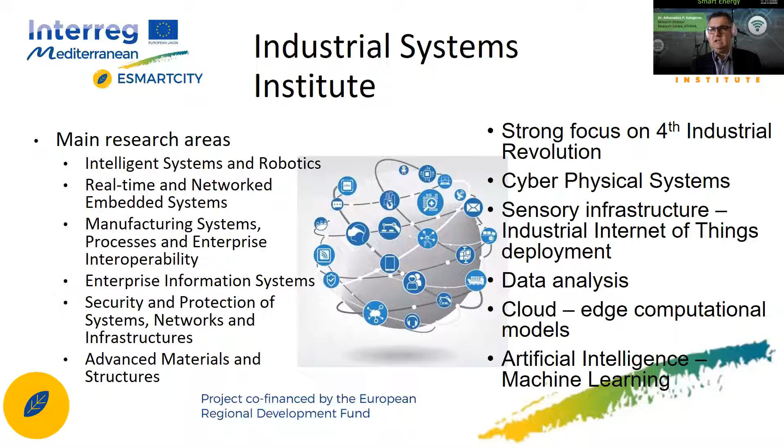It is an institute that focuses mainly on industrial systems, so the main research areas are intelligent systems and robotics, real-time and networked embedded systems, manufacturing systems, processes and enterprise interoperability, enterprise information systems, security and protection of systems, networks and infrastructures, and advanced materials and structures. We have a strong focus on the fourth industrial revolution from the point of view of cyber physical systems, systems that combine the cyber dimension and the physical world. This means deploying sensor infrastructure, the industrial Internet of Things, getting data out of it, exploiting cloud and edge computing models, and on top of it applying machine learning and artificial intelligence to have advanced services.

So the motivation behind our problem is that urbanization is a trend in our world. 60% of world population will be living in cities by 2030, and the urban population is increasing by 1.5 million per week. Cities account for 60 to 80% of global energy needs, so actions taken in cities can have a significant impact on energy saving and energy efficiency. When it comes to buildings, buildings use about 40% of total energy and 70% of electrical energy, and account for 1/3 of greenhouse gas emissions.

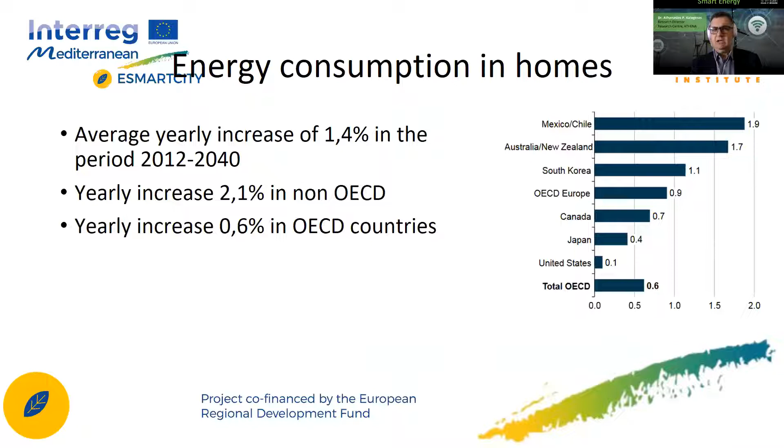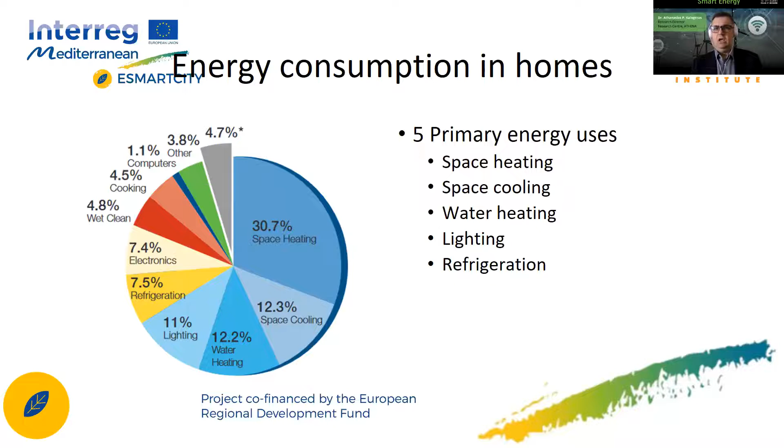With reference to energy consumption in domestic buildings, in homes, there is an average yearly increase of 1.4% in the period 2012 to 2040, with the increase in non-OECD countries being 2.1% and 0.6% in OECD countries. The 5 primary energy uses in domestic buildings are space heating, space cooling, water heating, lighting, and refrigeration. When it comes to the commercial sector, the average increase is 2.1% in the same period, 3% annually in non-OECD countries, and 1.6% in OECD countries, with 5 primary energy uses being lighting, space heating, space cooling, ventilation, and water heating.

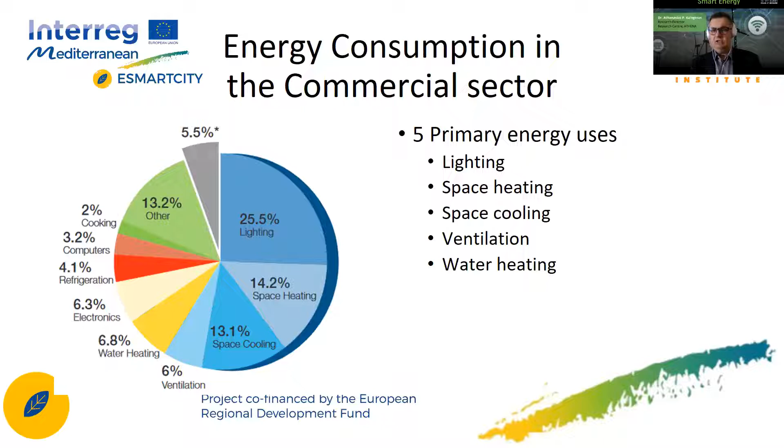So the project stood up to this challenge and performed pilot testing in 6 different countries related to 2 cases: energy efficient buildings and public street lighting. To this end, we had 4 public lighting networks in Sarajevo, Bosnia-Herzegovina; Lyon, France; Pescara, Italy; and 2 municipalities near Granada, Huetor Tajar and Agron in Spain.

Then we had a second case involving public buildings from the point of view of energy efficiency, so we had a total of 53 public buildings in Greece, Italy, and Portugal. The project produced a strategy document, a green paper on innovation policy change to drive towards smarter cities, which is available and can be downloaded from the project website with some policy recommendations to this end.

The pilot case, one of the pilot cases associated with energy efficient buildings, was employed at our building at the Patras Science Park, which had as a goal to experiment with energy efficiency and living lab scenarios, deploying the necessary infrastructure for monitoring, controlling, optimizing, and testing energy efficiency.

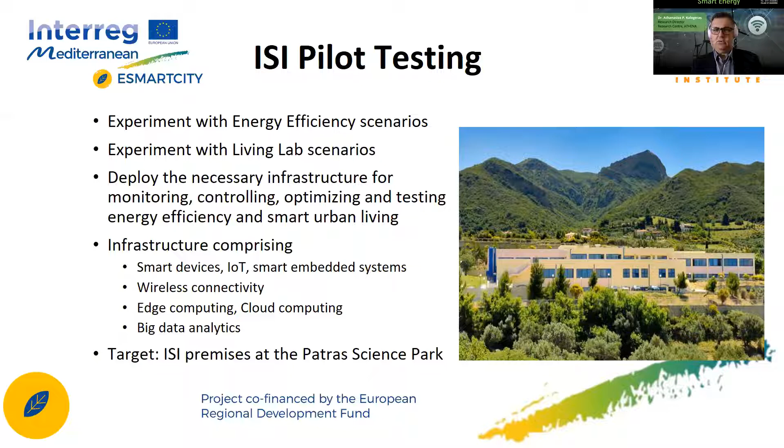The specific goals were to take advantage of high performance IoT technology, to integrate diverse devices with a lot of heterogeneity, to prove interoperability between solutions, to exploit open source solutions wherever possible and be based on standardized protocols, to adopt a suitable distributed embedded infrastructure, to utilize edge computing and cloud computing so as to exploit the intelligence at the edge of the network, to utilize industrial Internet of Things data acquisition platforms, and to finalize and deliver smart monitoring and control solutions integrating big data analytics for energy consumption and providing optimization of user comfort.

And the solution provided is scalable and replicable and can be transferred to other sites.

The proposed system comprised different types of parameters. There was power consumption, light, humidity, temperature, and human presence that were measured in the building.

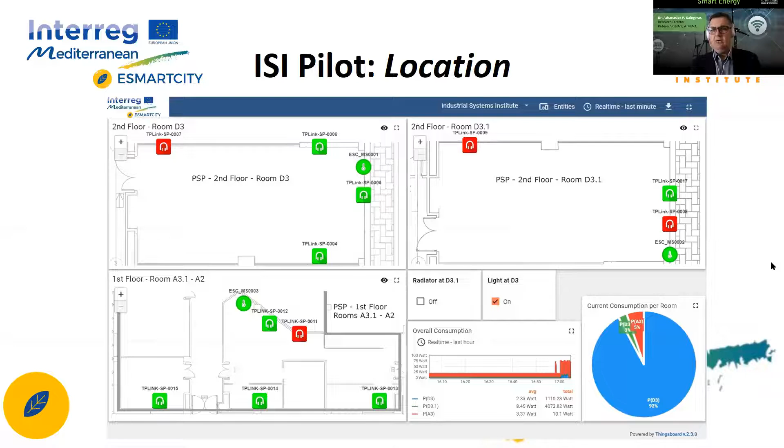Here is an image from the final system with the location of the different devices installed, and here is a panorama of the different technologies. You can see from the hardware point of view that different solutions were integrated, both proprietary and open source. Also different communication technologies were utilized, and finally different software platforms were integrated to provide the overall solution.

The architecture that we used involved the measuring equipment and the IoT equipment at the edge tier with different communication technologies, Zigbee, Wi-Fi, interfacing to the platform tier via the MQTT protocol. A NoSQL database, Cassandra, was used, and the information finally passed from a commercial platform, Thingsboard, to the enterprise layer where the intelligence of the system resides.

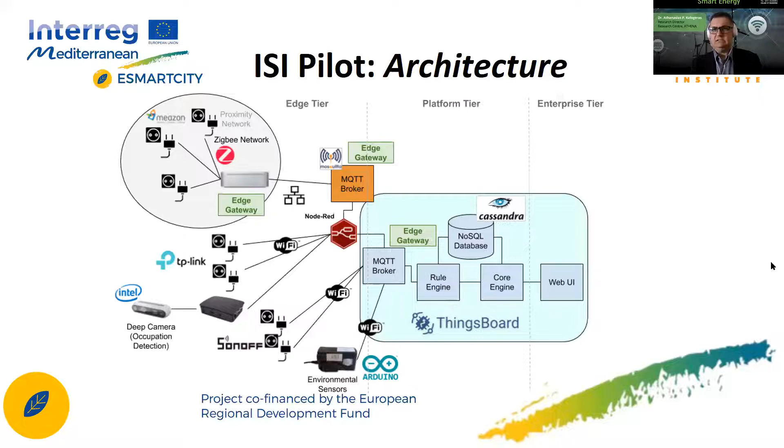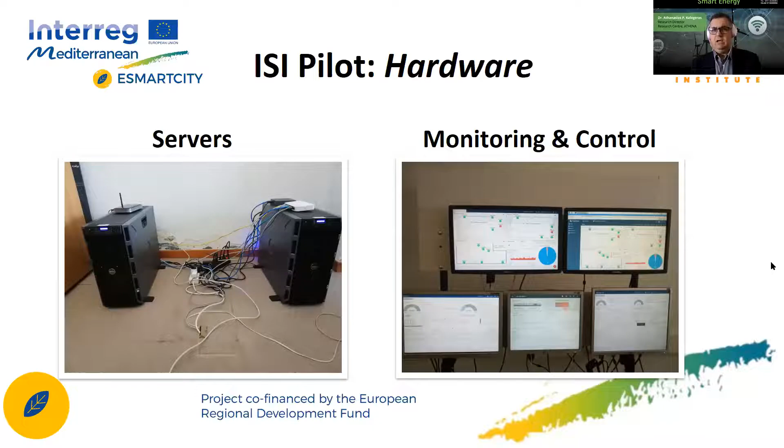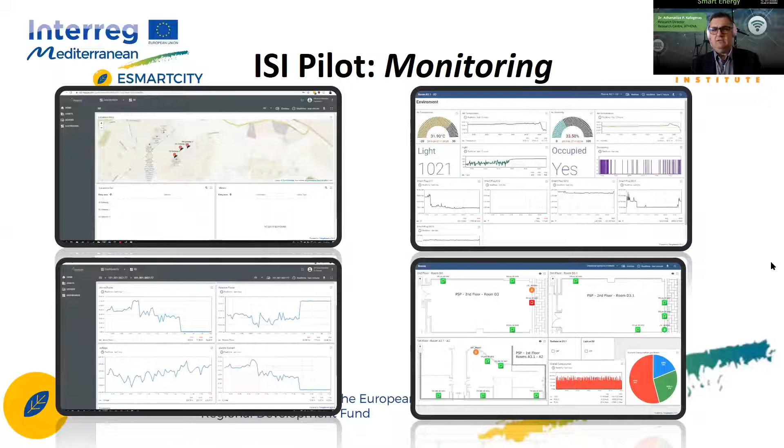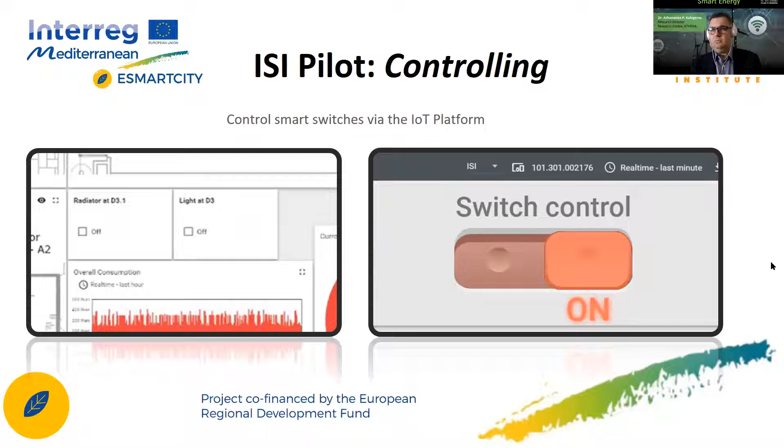And the HMI with the monitoring, providing different types of views so as to be possible to see the energy consumption and the different other measurements at the building level and on the different offices and laboratories. And finally, some control is also possible via the system, with optimization using a rule-based mechanism for scheduling and optimizing the power consumption.

The overall idea is that there is a data set that comprises the different measurements from the building. Then the question is what you do with this data, how you analyze it, and how you exploit the data towards achieving more advanced features.

So here we tried to see how we can deal with imbalances in energy demand and steep demand surges, disassociating the demand time span with renewable energy production, with a goal to detect load profiles whose peak demand could be not according to the power grid. As Moshe said, this might be a very important factor because otherwise you should build more power plants, etc.

So some ideas about energy profiling. This is a powerful tool for estimating the overall energy consumption. You can use static factors like the building orientation, the occupancy of the building, the environmental conditions, etc., that can contribute to estimating the energy consumption of a building.

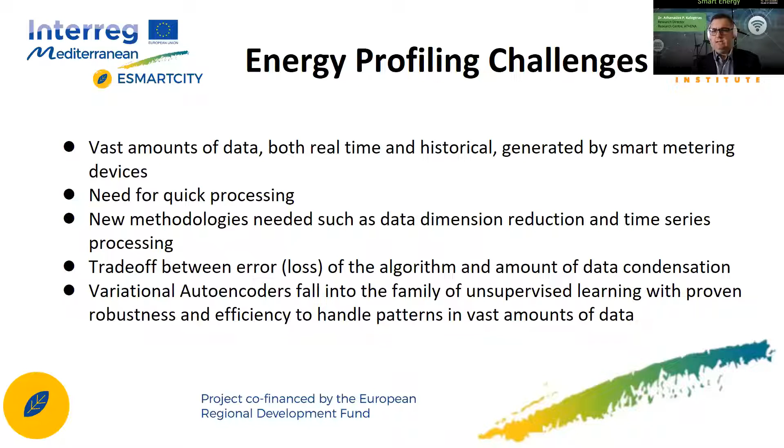Our proposal was to employ such a mechanism and enhance the variational autoencoder, applying recurrent neural networks in the encoding and decoding modules at the start and the end. You can see there are two units called LSTM encoder and decoder, which stands for long short-term memory neural networks, used to encode and decode data.

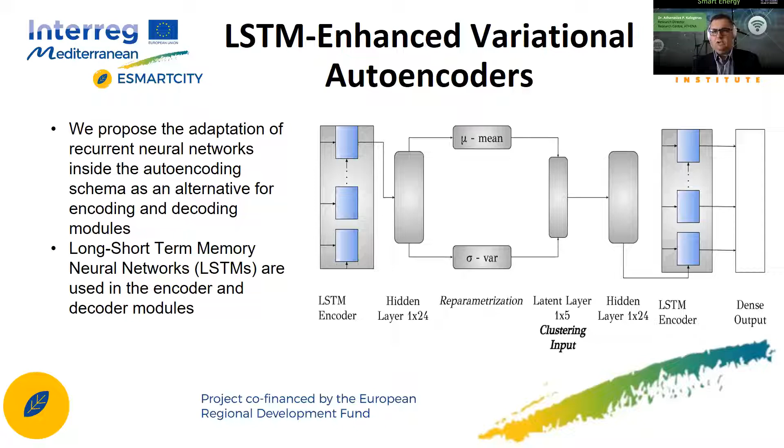This autoencoder is trained to output the given input data series, with the beginning and end modules, the encoding and decoding modules, replaced by recurrent neural networks so as to captivate time dependencies.

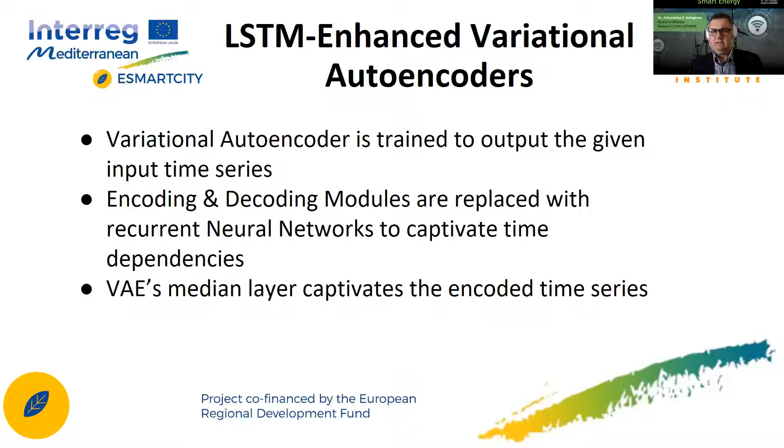In order to evaluate this approach experimentally, and due to the fact that the data set from our building was too short, only one year, we needed larger data sets to proceed. We took into account a residential sector data set from London, an open data set derived from the address depicted on the slide, which contains identifiers for the different residencies, the specific date and time of measurements, and the power consumption of the residential building.

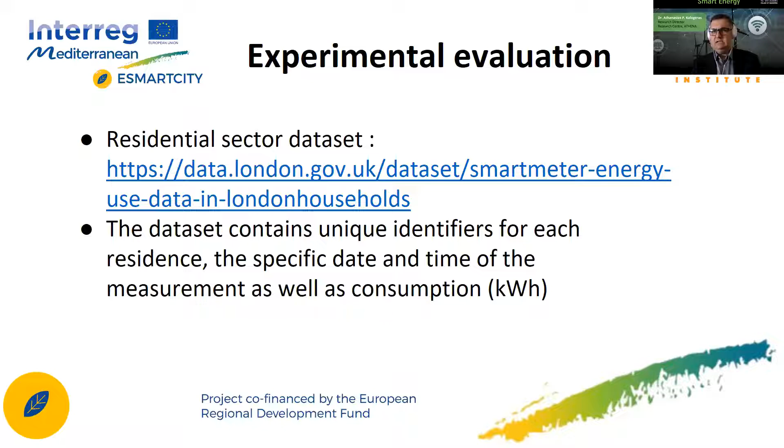Based on this, we split the residential buildings into two clusters. One cluster is compliant with green energy and modeled according to the green energy supply - imagine you have photovoltaics on the building producing electricity. So we clustered the buildings into two categories: one where power consumption is according to the generation of energy, and one that is complementary.

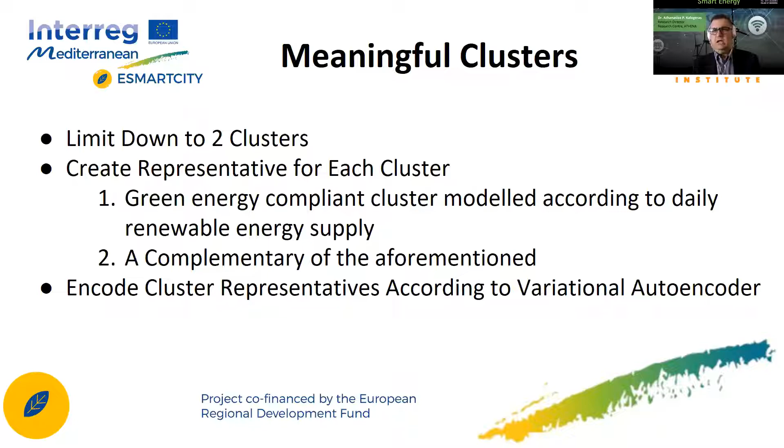We encoded the cluster representatives according to the variational autoencoder, and here you can see the two cluster characteristics. The second cluster is somehow compliant with the energy consumption of the power generation by renewable energy, and the first is the complementary of this.

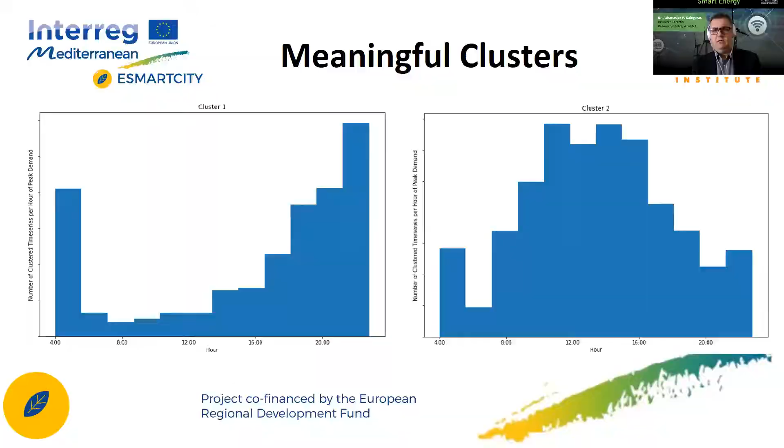We did different experiments with other types of tools, K-means and spectral clustering, in order to see which worked better. The first figure shows on top the K-means and spectral clustering, and you can see they failed to capture the peak demand for the two clusters, while on the right you may see the variational autoencoder, where there is compliance and disambiguation between the time series for the two types of clusters.

On the right, sample 2.2 is about the renewable energy compliant cluster with the peak of energy consumption according to the graph in the previous slide, and the second, sample 1.2 on the left, is the non-renewable energy compliant cluster.

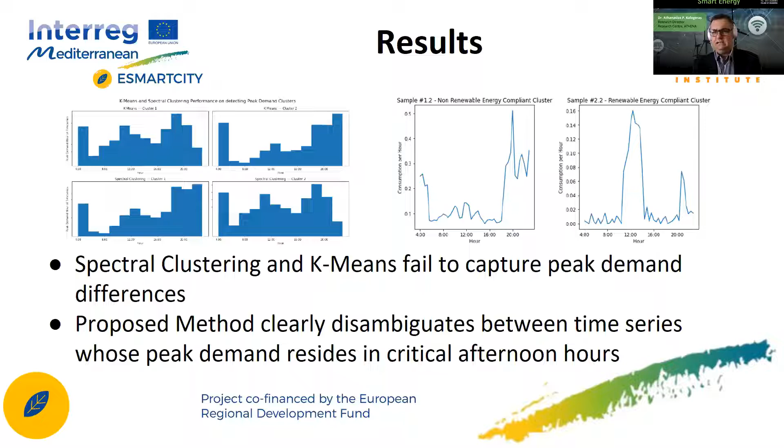The result is that the variational autoencoder method makes it possible to disambiguate and provide useful information related to the clusters of buildings, and this allows you to derive some good results with reference to this. This is a first effort. We are continuing our work towards this end, trying to include a larger parameter set, further to the renewable energy produced at the building site, and this can be an initial stage of some work on a wider energy profiling attempt.

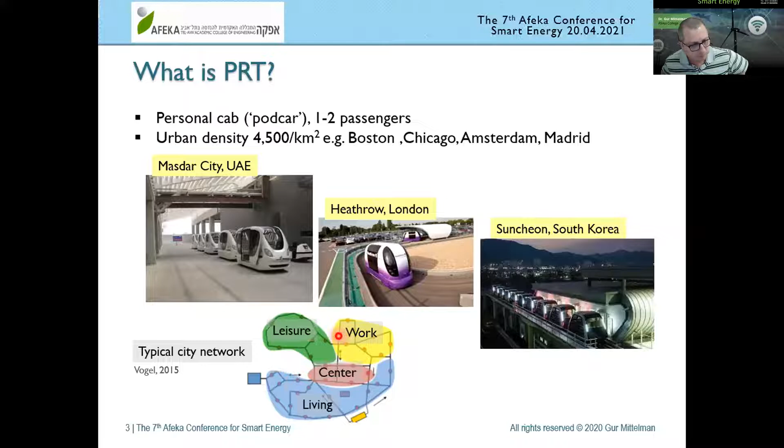One approach is the PRT—personal rapid transit. PRT is a personal cab, probably an electric vehicle, that comes on demand. It carries maybe 1 or 2 passengers. It's not a new idea, known probably since the 1970s, and there are already 3 or 4 successful commercial demonstrations all over the world. The idea is you can get from anywhere to anywhere within your town, from station to station. If everything is interconnected, you don't have to stay in traffic jams or look for a parking lot. This could be very, very pleasant.

What we are interested in here in our research is the energy supply, the energy management aspect. There are a lot of issues here, but we focused on energy supply because this is an interesting and valuable problem. There are a few options: the battery, like any electric vehicle; electric rails, like overhead catenary, which is very common; the third rail, whereby another rail is placed next to the driving rails to provide electricity to the vehicle or train; and magnetic levitation, but this is rather new technology—not yet well proven, with no big commercial demonstrations and not a lot of data to work with.

So we decided to focus on two options: battery or third rail. Overhead is a good option, but in very dense cities, where streets are narrow and there isn't much space for infrastructure, overhead will be problematic. So we are left with two attractive, generic options: third rail conductor and battery storage.

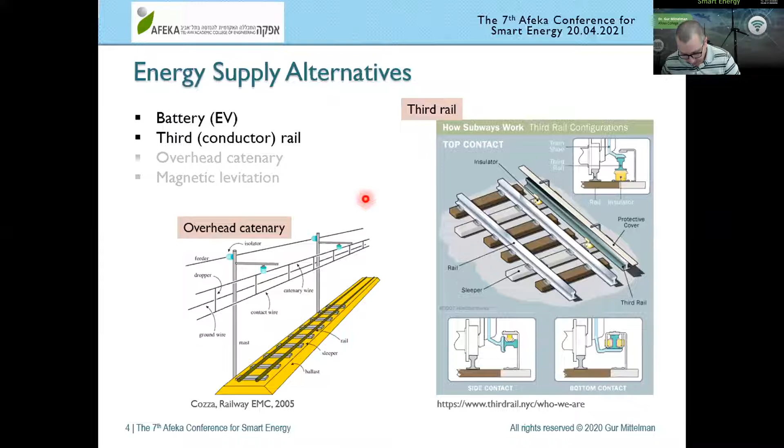So what is the objective? It's about developing a model and also implementing it for the entire energy management system—from the grid all the way through the battery, the powertrain, and other elements, to the wheels—while also taking into account balance of plant components, such as the stations and other things we will see later.

There was a big work or study published a few years ago about the tractive energy requirement without considering the entire system. So we decided to extend the model to include the whole system. What we actually do is go from the wheels—from the tractive or propulsion requirement of the car—through all the components to the grid.

To get the whole picture about how much energy is indeed consumed in this system, which is rather complex, we picked a model.

Our research is not about developing a new technology, okay? It's about modeling. So we picked a vehicle model, which is a small electric car suitable for PRT system rails, with small dimensions, can carry up to 2 passengers, and with some data considering the resistive forces of this car.

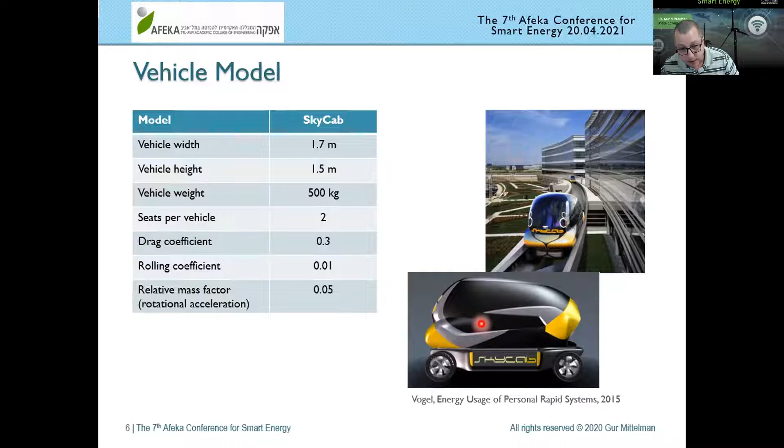This is our vehicle. But a vehicle is not enough. We have to consider the whole guideway system.

So we choose for the case study the city of Herzliya, with 11 stations and an overall rail length of something like 12 kilometers.

Some other parameters we have to consider are how many cars we keep. Some of them are moving and some are idle. Some of the cars are occupied with passengers, others are empty. This was also considered in the study.

This is actually a result of a previous study made by another group of researchers from Afeka, who were not interested in the energy problem, only in the infrastructure and the design. So this is the resulting data of their work.

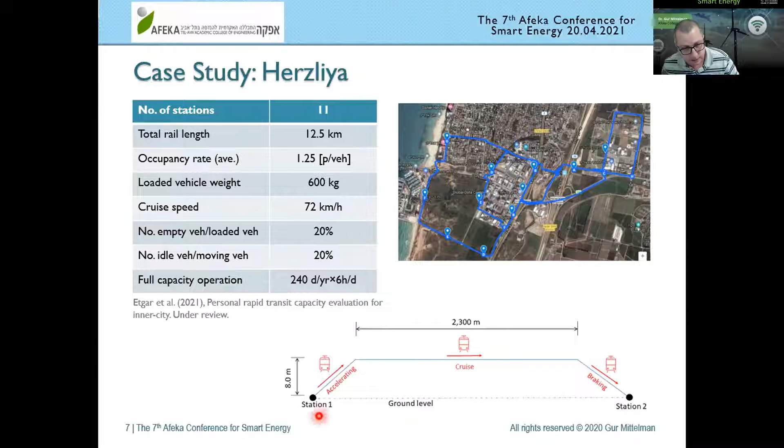Now, we consider that the train or pod car, the taxi, the car, whatever we call it, is accelerating from the ground level, picking up a passenger from station 1, say, and then cruising for most of the distance, which is good from an energetic point of view because when cruising, the power requirement is minimized, and then braking to the other station. This is a typical network between 2 stations.

About the kinetics, this is rather standard mechanical physics. There are 5 forces acting on the vehicle. 4 of them are resistive: drag, rolling, gradient, and acceleration, if any. Of course, during the cruise there is no acceleration, but in general we have 5 forces.

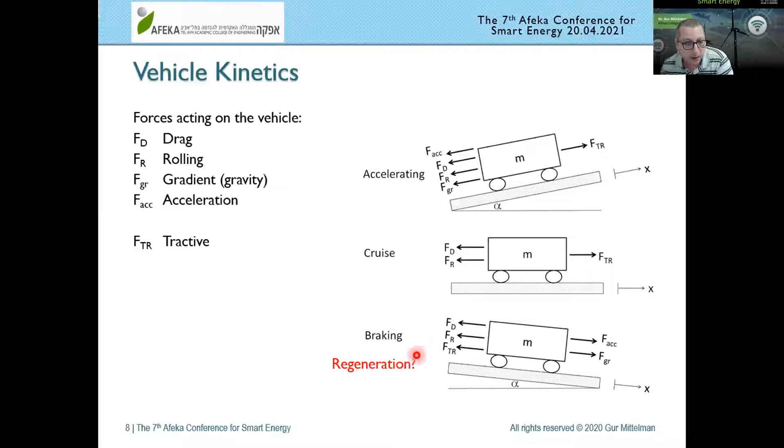The very important thing is what happens while braking. While braking, the car has energy, and the question is, can we generate electricity or energy while braking? Well, the answer depends on our design. If we have a battery, for instance, then we can, because we can charge a battery. If we don't have a storage device, we probably cannot do regeneration without significant technical complications. So we also consider this effect in the study.

So the kinematics goes pretty much as follows. The acceleration is changing. This comes as a result of the comfort requirements of any vehicle. The vehicle can never drive under constant acceleration. So the acceleration is increasing up to some limit, which is defined by literature. According to comfort, it's 2.5 meters per square second.

And then cruising, and then while braking, acceleration is of course negative. The tractive force and power is, not surprisingly, at peak at the end of phase 1, because the drag force is highest. The velocity is already at cruise, and the drag force is highest at this point.

So this is the most of the tractive power that you're going to get. And the tractive power, as we see, is not fixed. It's not fixed by time. It's changing with time all the time, the tractive power.

This is very important because if we consider a constant voltage system and the power is changing, that means the electrical current is going to change with time. And this is very, very critical for the energy loss and the design of the grid and battery system.

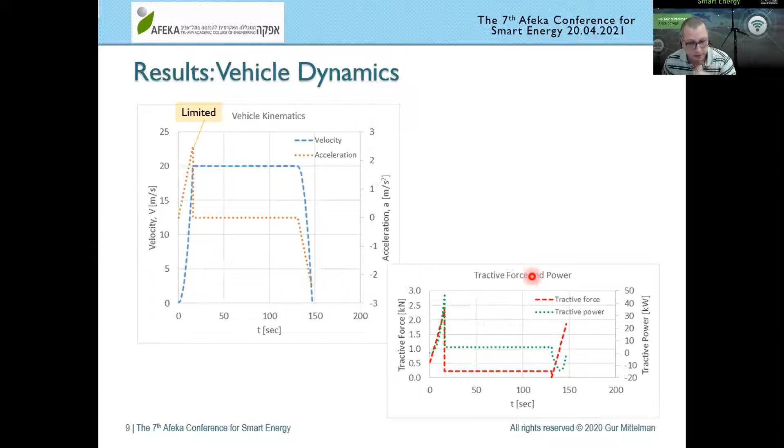So for the battery bank, we consider a standard lithium-ion battery, like state-of-the-art commercially available batteries. Many companies have developed such batteries, like Tesla. And we must consider the operating temperature. The battery must operate in order to keep a reasonable lifetime and not die very quickly. One needs to maintain the temperature probably below 30, maybe even close to 20 degrees.

But that means you must cool the battery. Must cool the battery. Many people ignore that. This can take a lot of energy just to cool the battery, because otherwise your battery is going to die very, very quickly. For instance, the Chevrolet electric car, one of the best electric cars you have, uses liquid cooling. They put cooled liquid within plates, located in between the battery cells, and this is how they maintain the temperature.

But this of course costs electric energy, because in order to cool, you need some air conditioning or compressor or something like that which requires a lot of electricity, and you must account for that kind of consumption in your analysis.

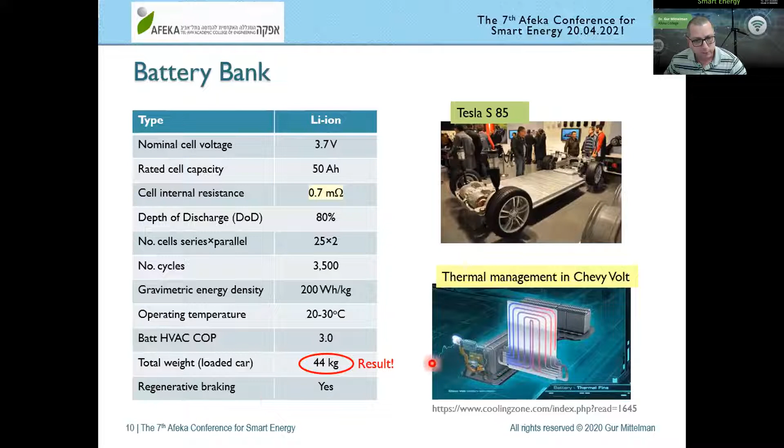Our analysis resulted in a battery of 44 kilograms for a loaded car. This result is not negligible, because the whole vehicle is small, maybe 500 kilograms. So this is not negligible. We considered, of course, that the battery can be recharged while braking.

Third rail is the other option that we analyzed. Here there is no battery, but there are other issues, like we have to convert AC electricity from the grid to the rail. Therefore, we need a power system, and there will be energy losses throughout this power system that we have to account for. Those energy losses again depend on the power or the electrical current that we provide to the rail, or that we get from the rail while braking.

So this was also taken under consideration, and we also accounted for the balance of plant issues. When we have a complete PRT system, it's not only about vehicles. You also have to keep stations, passenger stations, in mind. They consume electricity, sometimes a lot of electricity, and there are vehicle auxiliaries like air conditioning, lighting, etc. And also there's the powertrain of the car. It's not just the wheel or the tractive power.

There is a powertrain in the car, and here we did something that probably was never carried out before: we modeled the grid and the battery. This means we don't use a simple single value for the efficiency of the grid or the battery, but we model it according to the current or the power. As I mentioned before, it is much more accurate and more realistic, because this is what's actually happening in a real system.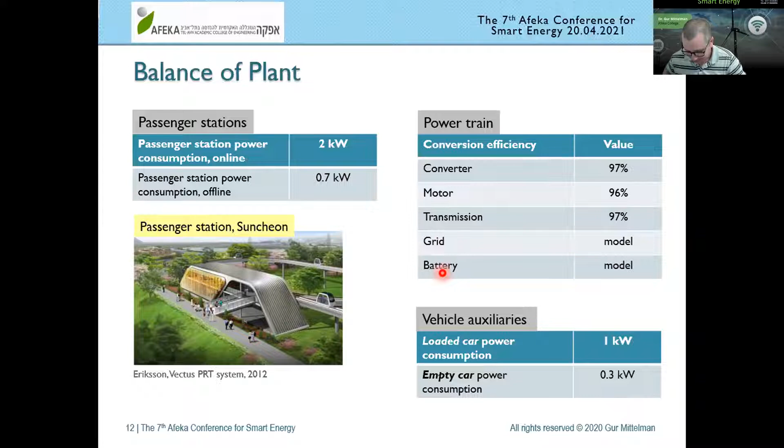Okay, and just to complete the data, because we were opting for a techno-economic model, we have to consider some economic values. We have to pay for the electricity coming from the grid, unfortunately, and we have to install the battery and the charging stations together with the grid connection. Battery, by the way, is not just the battery—it's the entire battery management system, as they call it, BMS, and the cooling system and the power engineering involved with the battery system. Everything has to be accounted for.

In the third rail solution, we don't have a battery, but we have to electrify the rails, which can be very expensive. Unfortunately, we don't have data for third rail that is suitable for small PRT vehicles, so we use a value available for large trains. We think it might not be so accurate, but we don't have anything else, so we use this value, which could be too much oversized. For the PRT, because it's based on small vehicles, electrification could actually be much cheaper, but we don't have a reference value, so we don't consider that. And grid connection also applies for the third rail, of course.

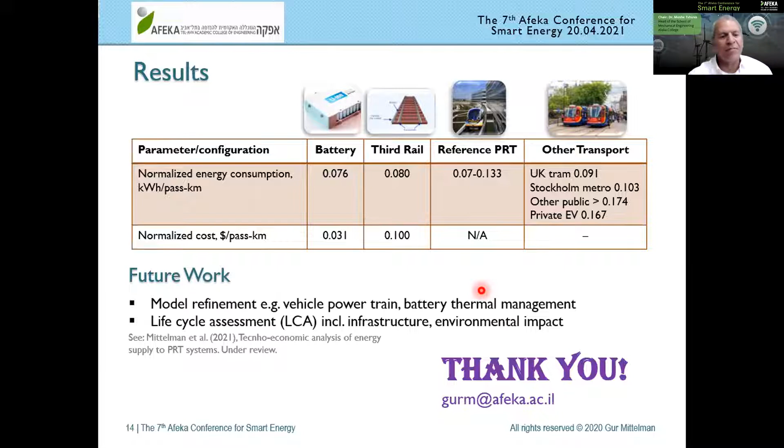Thank you, Gur. We have one question from Nadav. He's asking about the concept - is it a real project or only a study? Right now it's only a study. But maybe Professor Erel Avineri can extend on this.

But in order to push decision makers towards installing real plants, we need to convince them first that it is cost effective, energy efficient, practical, and so forth. So we must do a study before we can convince anyone to make a decision. But I believe Professor Avineri is more educated about this issue of implementing PRT.

Okay, Erel, you want to say something? Just to say it's not completely theoretical - there are a few systems operated on a mini scale around the world. One system operates in Heathrow in London, another one in Masdar City. So there are a few examples of how this can actually be implemented. Our model was using the most updated data, so it's kind of the next generation of PRT rather than the systems already activated.

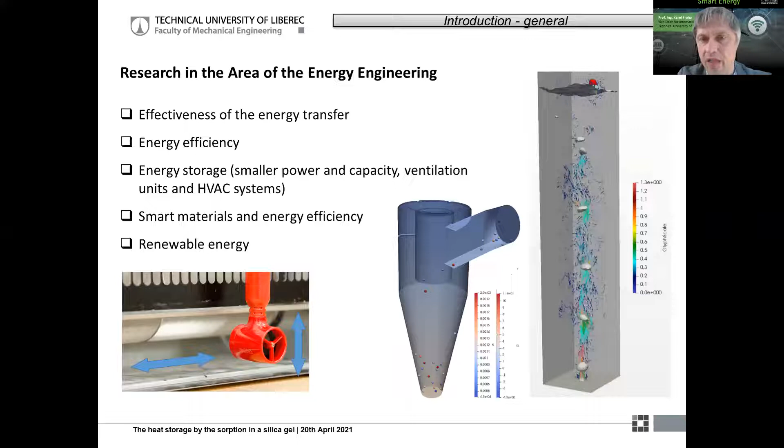My area of research is the area of energy, and we are looking at different kinds of problems, but the goal is the same: to save energy. We mostly focus on energy transfer and energy efficiency. We look as well at technologies used in smart buildings, mostly connected with energy storage. And of course, one part of our research is focused on smart materials and material research, because a lot of properties and processes are connected to material research, so it's part of our interest as well.

First, what is generally the method which we use? I will mostly be talking about experiment and CFD. The experiment, because I'm coming from the field of thermodynamics and fluid mechanics. On one side, we design equipment in which we can confirm or study some processes in order to understand them in detail, and secondly, in order to improve the facility or operating conditions. For the experimental part, we use a lot of measurements like PIV, hot wire anemometry, and so on, in order to identify the velocity field, the temperature field, and to understand the background of flow features and thermodynamic processes.

Another part of our research is concentrated on theoretical research, represented by CFD, computational fluid dynamics. For the calculation, we use three different types of computational codes - one that everybody probably knows, which is mostly preferred for students' work and diploma work. I myself prefer to use OpenFOAM, which has a lot of advantages; one of the most important is that we have the source code, so we can extend this code to program the parts we need to study. In the past, I worked a long time to develop our own computational code, called FEM3D, or finite element method for 3D, which is fully parallelized and used for incompressible flow simulation. The biggest advantage of our own code is, of course, that we can completely control our computational processes inside.

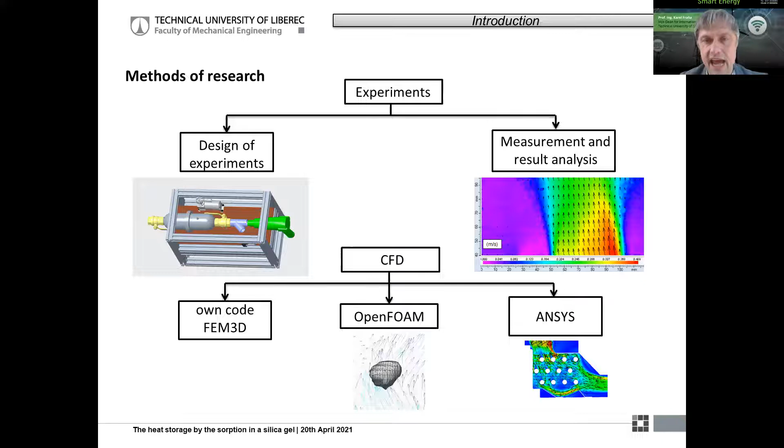So this is the technology, or the techniques, which we use to carry out our research, and I wanted to mention this at the beginning. Now I'll go slowly into the topic of our research.

One of the topics is the absorption process, which we use for thermal storage, and we are just at the beginning. Our task, or our goal today, is to construct a facility with which we'll be able to demonstrate the feasibility of this technique. We are studying the material properties in order to reveal under which operating conditions we are able to effectively store energy.

If I tell you at the beginning some main aspects or facts about this kind of heat storage - of course, everybody knows, when we talk about heat storage, we can imagine sensible storage tanks or latent storage tanks, which are commonly used, and with this technology we have a lot of knowledge. On the other hand, it's possible to use the sorption process, which is relatively new. Using the sorption process, we can practically store and afterward release more energy per kilogram of material compared to what is used with, for example, sensible heat storage.

We also have no problem with the change of volume, which is the critical point for latent heat storage systems. And what's also an advantage is that you can store this heat for a long time without heat losses. It looks funny, because on one side we store heat, and on the other hand we have no problem with heat losses - which I think is just fascinating, to carry out this kind of research and to use this technology in the future for heat storage systems.

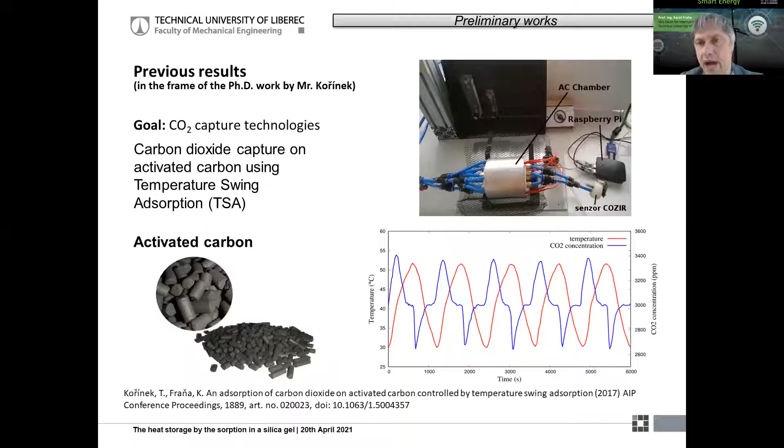Not only the experiment, which is just one way to study this problem, but we also carry out numerics. Numerics is not easy to do; in this case we use OpenFOAM, and we look inside to understand how this sorption process is working, which helps us understand the background of the sorption process.

The basic question is the effectiveness of the sorption process for CO2 storage. We carry out both the numerics and the experiment to extend the experimental results with numerical or theoretical results, in order to find or design the appropriate system that can store a lot of CO2 using a relatively small amount of material.

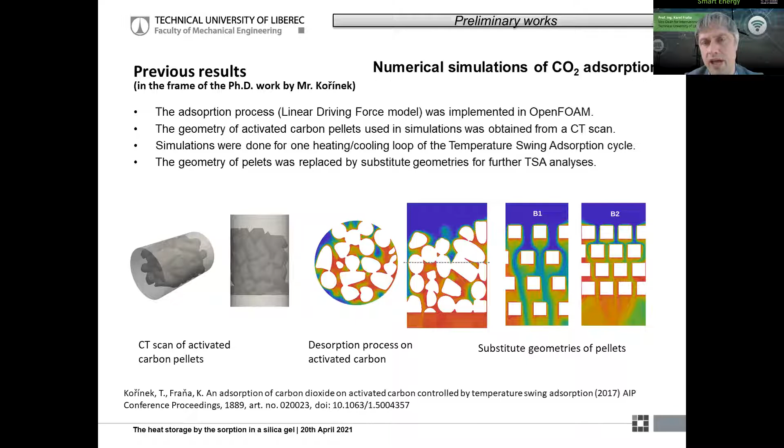There are two slides demonstrating the previous research. Actually, five years ago we started this process, studying the sorption process used for CO2 storage. Today, we are moving in the direction of heat storage, but the sorption process and all the knowledge we already founded here, we can use furthermore.

If you look at this problem, we are going in the direction of using silica gel. This is solid adsorption. Silica gel is the first option, used together with water. The second one is zeolite, which is mostly the second option to use for heat storage.

What is the difference for us? Especially the fact that silica gel can work at a lower temperature field, so it's better for the experiment because we don't have to heat the air up to such a high temperature level. Secondly, silica gel is very easy to have or purchase, and some material properties are well known. This is the reason we decided, as a first step, to use silica gel.

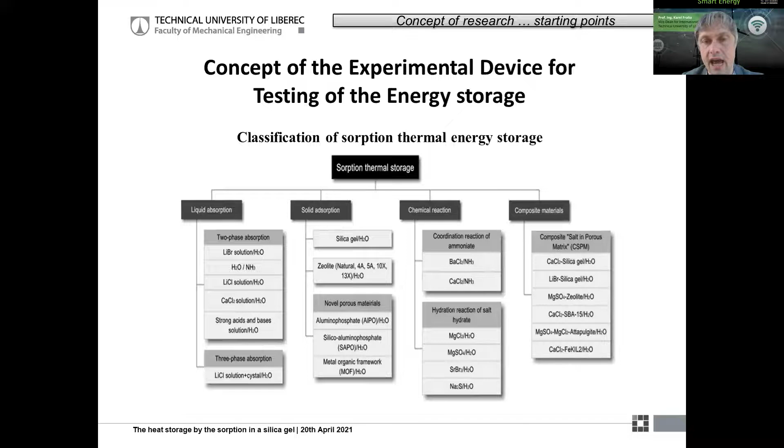We can change the different modes. That means we can dry up the material inside, which is used to store the energy, or to release the energy we use the second step: we mix the air with humidity, with moisture, in order to start the chemical reaction. During this, we can release the energy again.

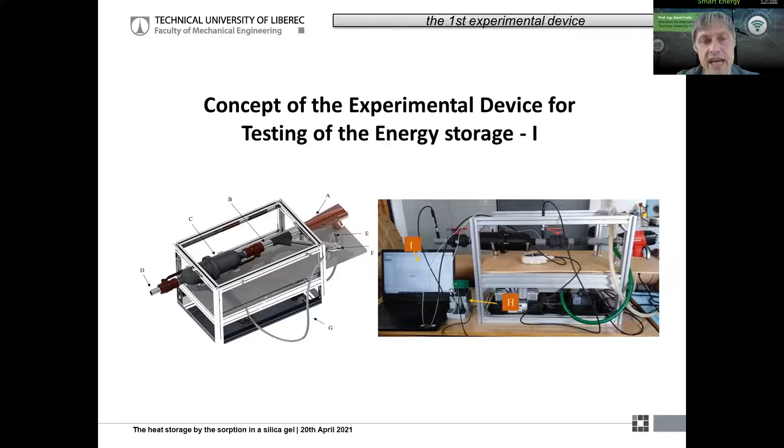How it works exactly, I can describe here: there are two steps in the cycle, which repeat each other.

The first process is called adsorption or discharging, meaning we use the energy already stored in the sorption tube. We deliver the moist air, which starts the reaction inside, and the material can capture this moisture. As a result, at the output, you will find hot air.

On the opposite, if the sorption tube is already empty, we start the second step, during which we charge this sorption tube again. That means we deliver only hot air - this is the drying process. As a result, you will find air and water together at a lower temperature, and during this process we can store the energy.

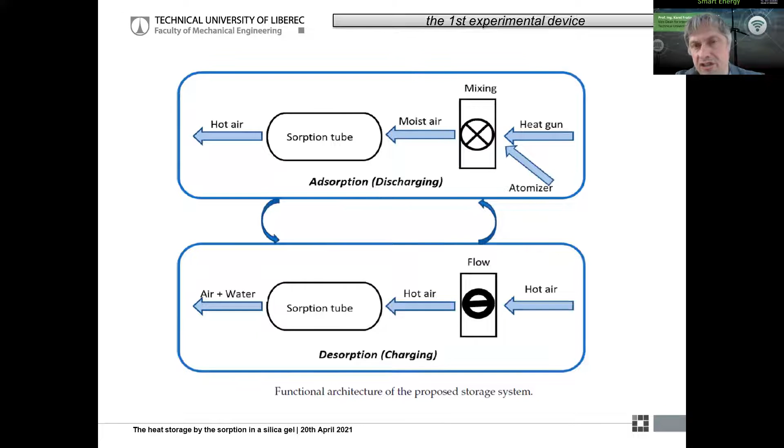If you create a cycle and repeat these two processes, we can discharge and charge the energy, and it's all about the time and frequency. Of course, the problem is that any material can degrade during this process, and this is our topic of research. I can show you some results.

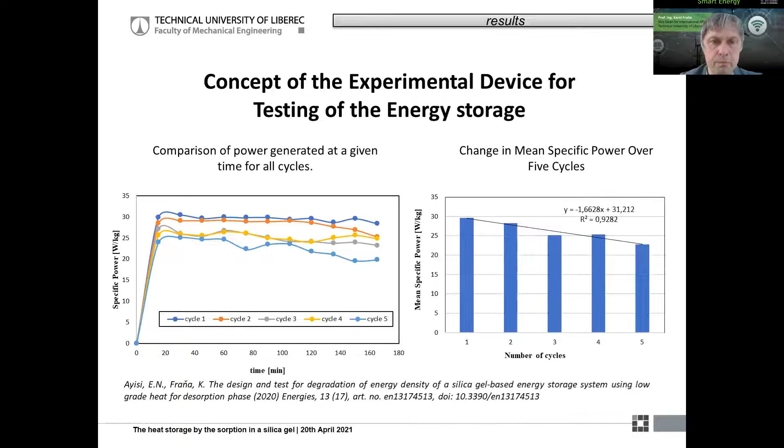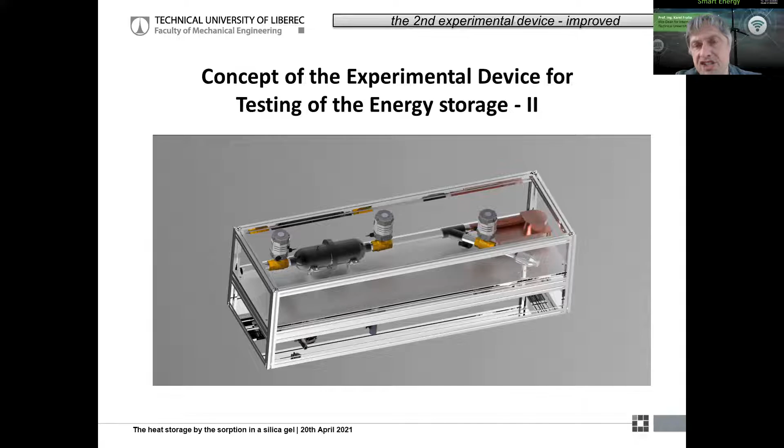So we can work with this hot air without any danger, and we can construct this experimental device. It's still under construction - we already have the first results, but we are still working to fully optimize the process. That means overnight we can significantly change the cycles in order to find the appropriate material properties.

So this is the conclusion, a summary of our testing, covering not only the first test but also the progress in the design of the second experiment.

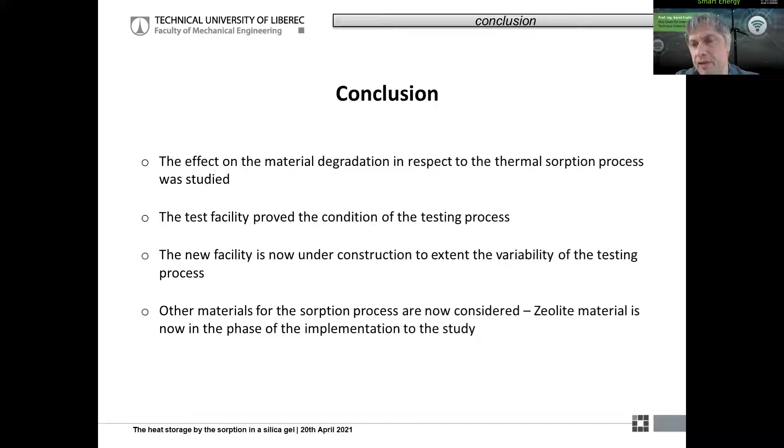And of course, not only silica gel is interesting - zeolite material is another material very popular today for this purpose of energy storage. We are thinking about using this material as well in the future, but it requires a higher temperature for heat storage.

Thank you, Karel. Very interesting. You were talking about 70 degrees. What were the temperatures?

Yes, the temperature was up to 70 degrees for the silica gel. That means if we are charging the energy, drying up this absorbent in the container, we use a temperature between 50 to 70 degrees. And of course the temperature can influence the process itself, so that's part of our research too. We know the material works in this temperature range between 50 and 70, which is also recommended by the producer of the silica gel.

For the discharging process, we use a lower temperature, about 30 degrees. So if you have some kind of residual heat, you can store it in the silica gel. Exactly, this temperature field provides excellent conditions.

We had two ideas for how to practically use this technology. The first is combination with solar power. Instead of water, we can use air, heating it up in the solar panel to reach about 100 degrees Celsius. We're not talking about concentrated solar power, but this is an excellent input temperature for such a facility. We can store a lot of energy inside the silica gel and use it, for example, later during the night. This is one practical application already possible to see today.

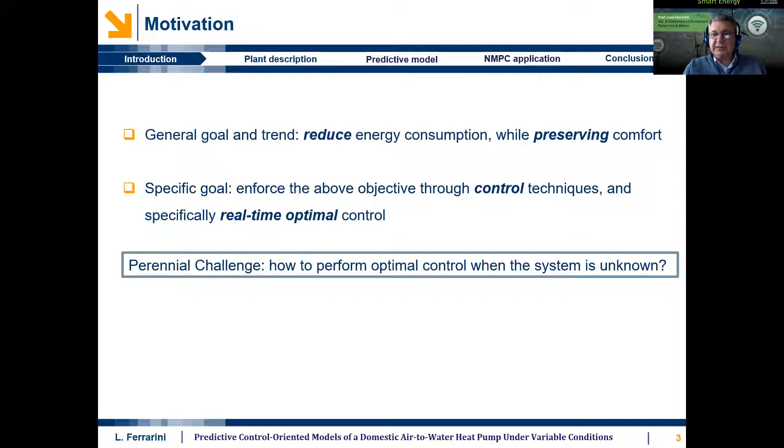In particular, we do not use generic control algorithms, but real-time optimal control over a finite horizon, which we call model predictive control. So the general challenge is basically how to perform optimal control — how to solve an optimization problem in real time when the model under investigation is not perfectly known. If everything were known mathematically, we could do marvelous things, but in general this is not the case. So the challenge behind this work is how well we need to understand the system under control in order to control it in a sufficiently good way.

This is not my concept, this is a well-established concept. The last time I heard about this was during the IFAC conference, during the plenary talk by Benjamin, who is a professor from Berkeley, California.

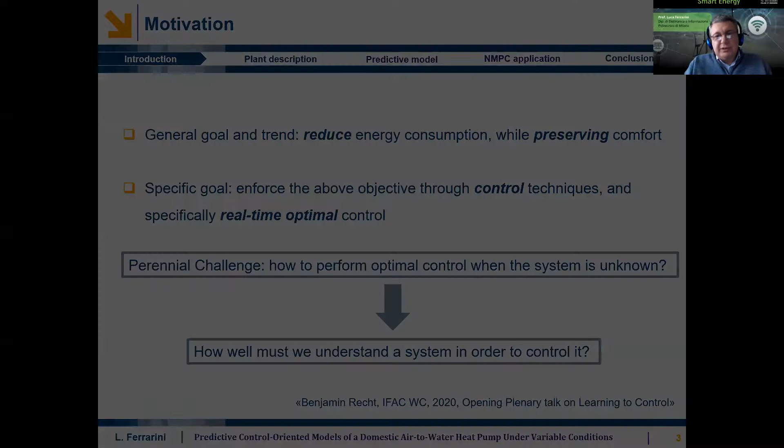The practical target is to provide an estimation and prediction of the behavior of the heat pump, a device which is very well known and studied, but still their models are not very used in practice. We studied this in order to decouple the generation from the delivery of energy to the building.

When you need a little bit of energy in your building, you may not use the heat pump because it's not convenient. So you need an energy storage device, as we have seen before, to decouple the generation from the usage, from the delivery. There are moments where the heat pump is more efficient, and it's better to use it there than store the energy and use it later.

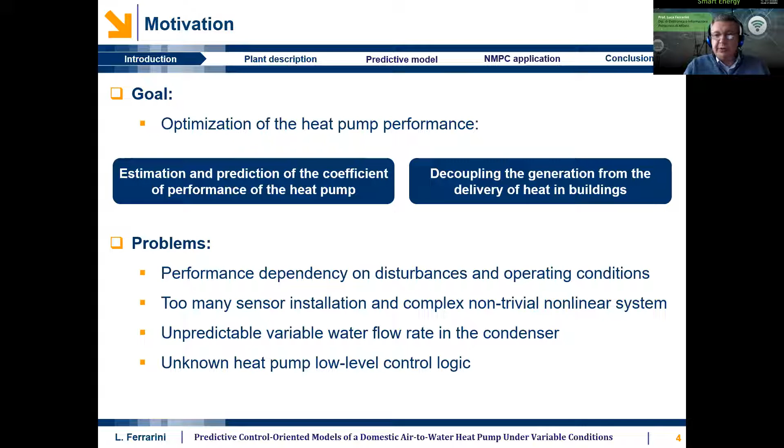That's the main simple idea. Model predictive control does exactly this job: it makes a prediction for the future based on the model, and then tries to optimize the behavior of the system.

So this is the testing facility that we use. It is a laboratory located in Denmark, in DTU, where there is a heat pump with a tank, associated with the distribution system, which is able to serve a load made by two houses, one with one floor, another with three floors.

There is, of course, a 3-way mixing valve in order to regulate the mass flows inside the load, again to decouple even more the generation from the usage. The tank is the energy storage element, but the 3-way valve is also able to enforce a recirculation of water, to reduce the temperature inside the pipelines.

So the most difficult task - sorry, let me come back. The idea is how to regulate, how to control the heat pump, how to tell the heat pump: you have to work now or later to produce water at a given temperature, in order to serve the load when there is somebody in the house providing their own desires about the profile of temperature.

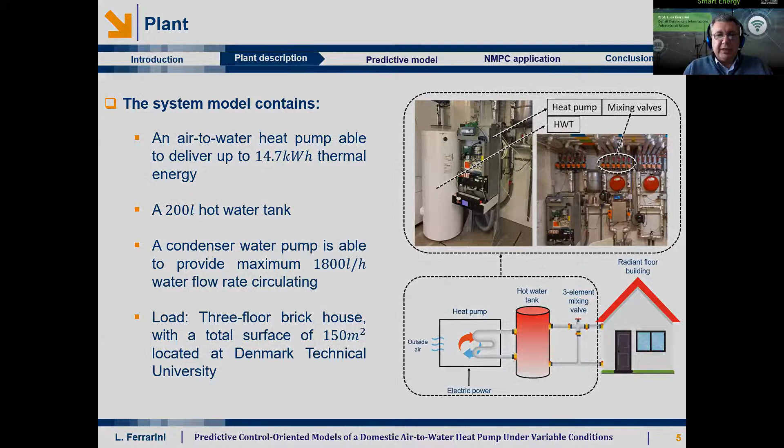So we studied a little bit the main components. In this presentation, I do not talk about the model of the house, which is assumed to be fairly simple, as is usually the case for mid-term control, mid-term horizon control.

So we studied the tank, the water tank, and the heat pump. Basically, we used a vertical stratified model for the hot water tank.

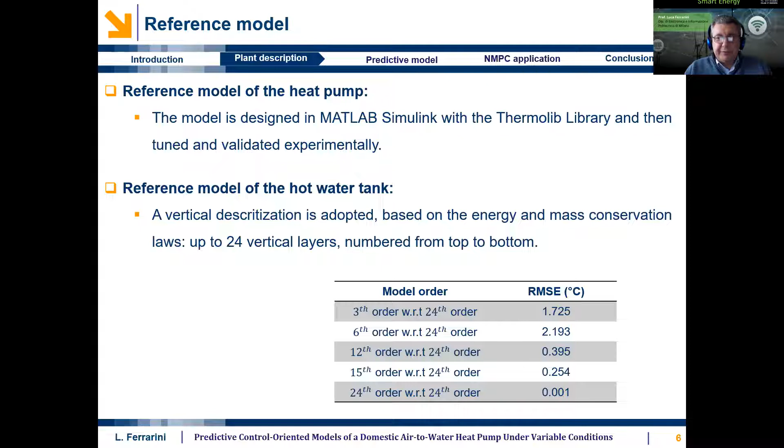And we compared it with a 24th order system in order to understand the root mean square error. We see that, based on the number of layers, the number of nodes that you put inside this model, you get a different quality of results.

For the heat pump, that's one practical problem, because when you buy the heat pump, you know there is a local controller inside which is able to switch on and off the local pump, which circulates the water inside the condenser side. And there are other switches and controllers inside that are not very well documented. So what we did is develop a reference model using the thermolib library, in order to correctly model the gases inside and all the phenomena.

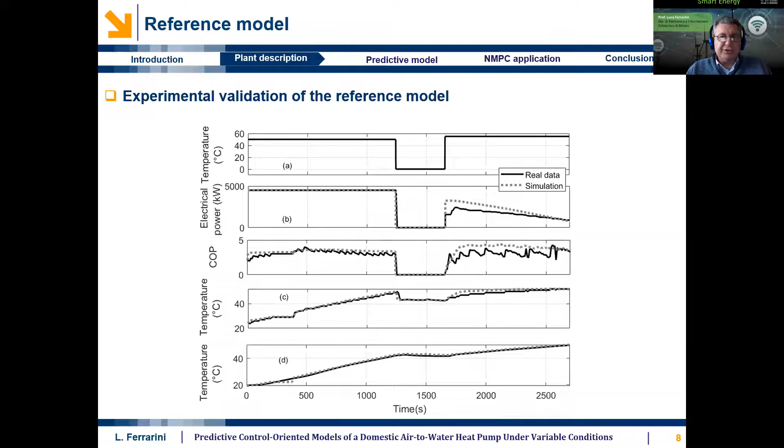In the end, we collected the data from the tank, from the various levels of the tank. We measured the electrical power, and then we managed to experimentally validate the reference model in all the ranges we are interested in. For the heat pump control, we need a model.

Usually sampling times are in the order of minutes; in this case we are using 15 minutes. The COP can be assumed as a nonlinear algebraic function, and there are usually a lot of possible combinations to approximate the behavior of the COP. In the past, we studied linear and quadratic functions with 1 to 3 different inputs.

Typical inputs are the outdoor air temperature, the temperature of the water that you have to heat, and the power itself, or the compression factor.

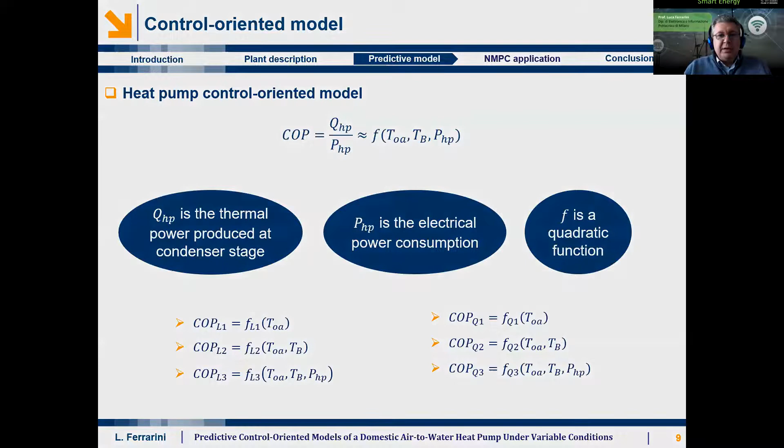So the main problem, one of the problems in the modeling of this system, when trying to reach the goal that we set at the beginning: the simplest model to achieve an optimal control is to model the mass flows between the condenser side of the heat pump into the tank, because that's the most straightforward way, but we have no measurement of the mass flows—how much water is coming into the tank and recirculating in the tank.

So what we did is model the heat simply as a function of the COP and the electrical power, and then distribute it in the tank as an exogenous input, so as an input of the model.

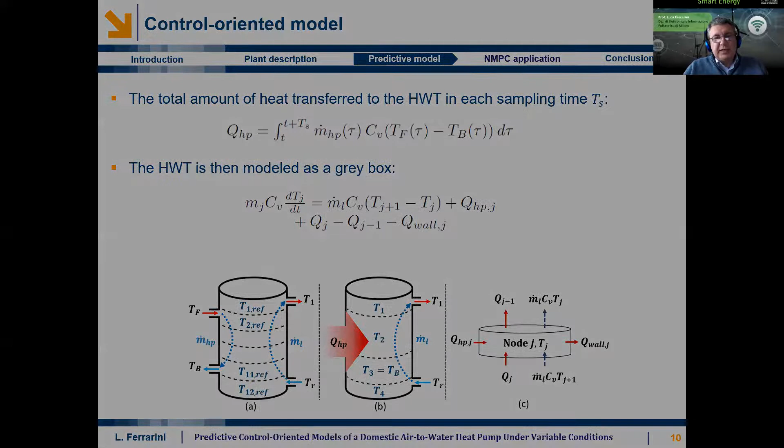And what we did is try to understand how we have to distribute this heat between the layers and how many layers we should use with such a simple model of the system. As you can see here, there are errors in this simplification. A good approximation is a model with 4 layers, with heat as an input and not mass flows as input.

And that's the typical error that we obtain: approximately a couple of degrees on the temperature inside the tank, which is an acceptable error. The temperatures are in the range of 40 degrees, more or less.

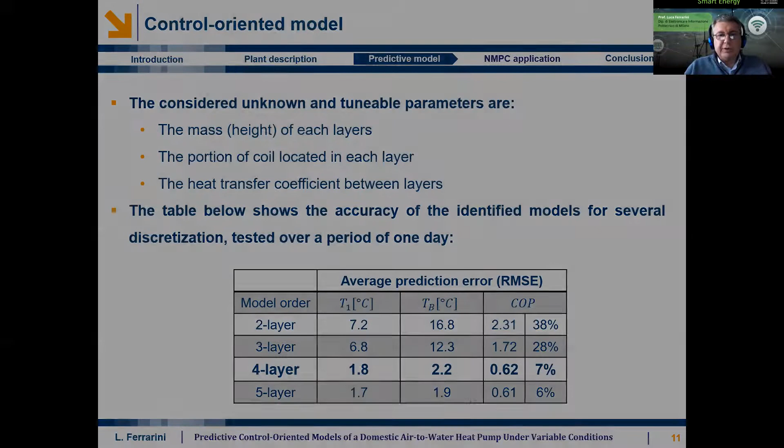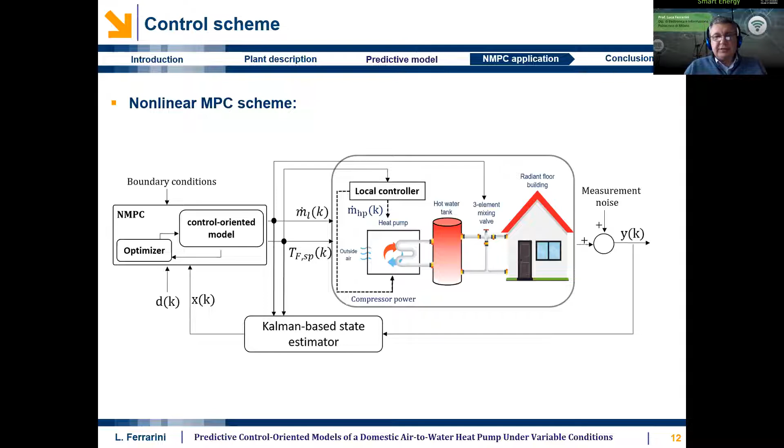So that's the challenge: if our model inside the controller is fair enough to control the system and simple enough to be implemented in real time.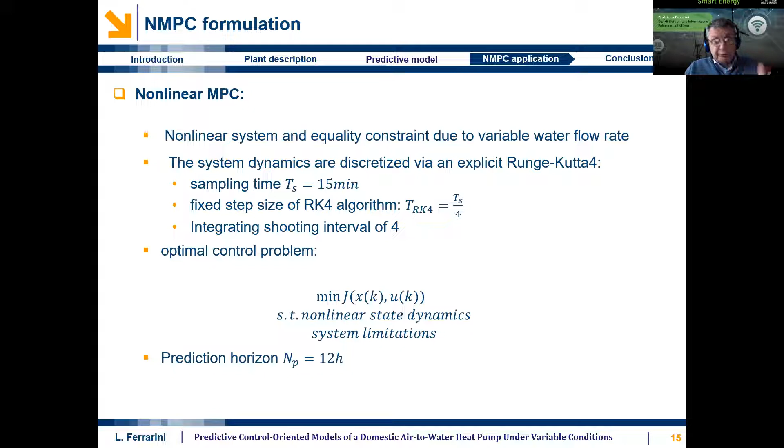We compared what we did with this optimal control problem with the classic heating curve control, which is basically a table, a function that tells you the right temperature for the tank based on the external temperature—so if it's very cold outside, you need to increase the temperature in the tank. We took this exactly from the same manufacturer of the heat pump, because this is what is actually implemented in the local controller of the heat pump.

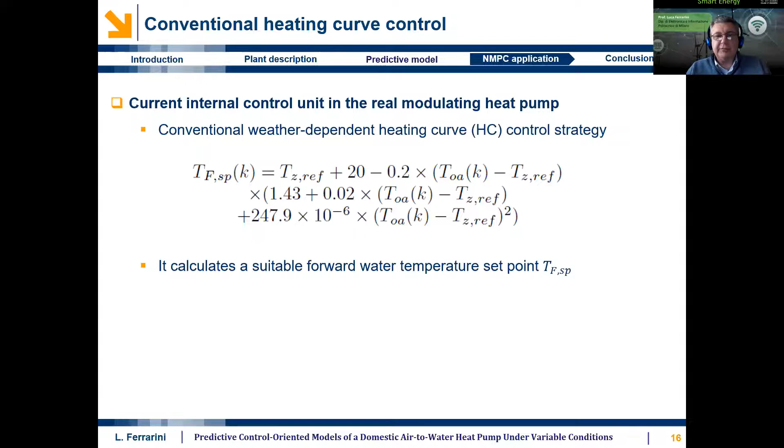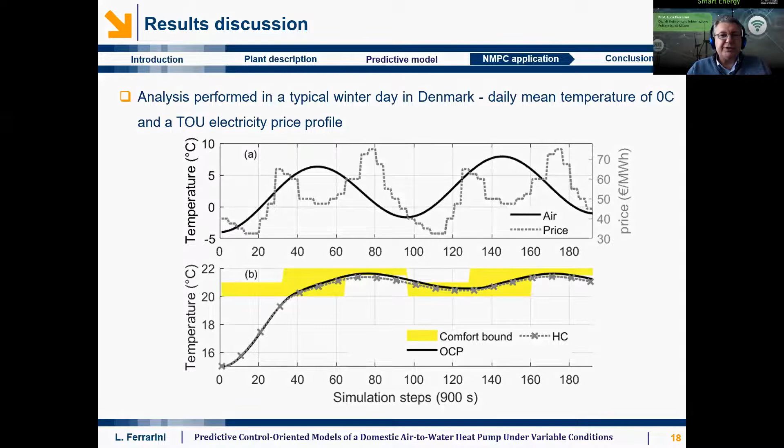We simulated one typical day in winter where the external temperature is around 0 degrees. We've seen that the comfort bounds are easily matched by any kind of controller. From the optimal control down to the heating curve, we are able to track the temperature inside the building. But the electrical power that we use is a bit different.

In the dashed line is the price that we invented, the real-time pricing. Our technique tries to use less energy when it costs more, and vice versa—when it's cheaper, you can use more electrical energy. So in the end, your heat pump is able to work at a lower temperature, and since the efficiency of the heat pump depends on the temperature of the water you have to heat, you can gain a lot in terms of efficiency.

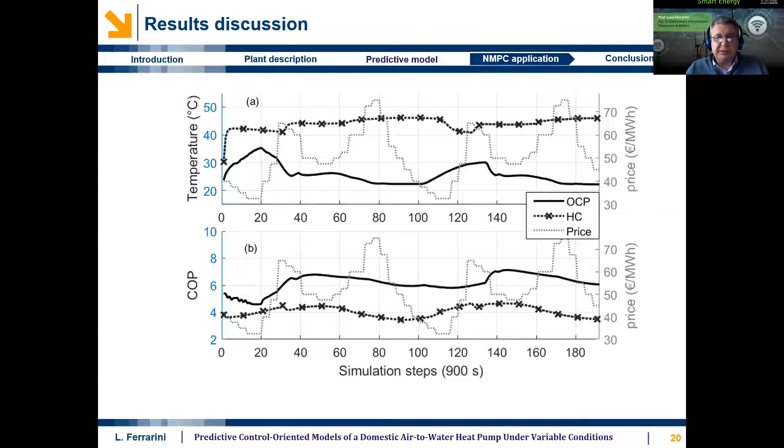Of course, when the heat pump's coefficient of performance is high, maybe you're not using the heat pump that much. So the overall saving is less if you look at the money or electrical energy that you spend with respect to the COP increase.

So basically what we proved is that it's totally feasible to set up an optimization problem in real time, even with non-linear models. Our algorithms run in MATLAB on a standard PC, and they usually take less than 1 minute to run. We are talking about a non-linear optimization problem with 48 points in the future within the horizon.

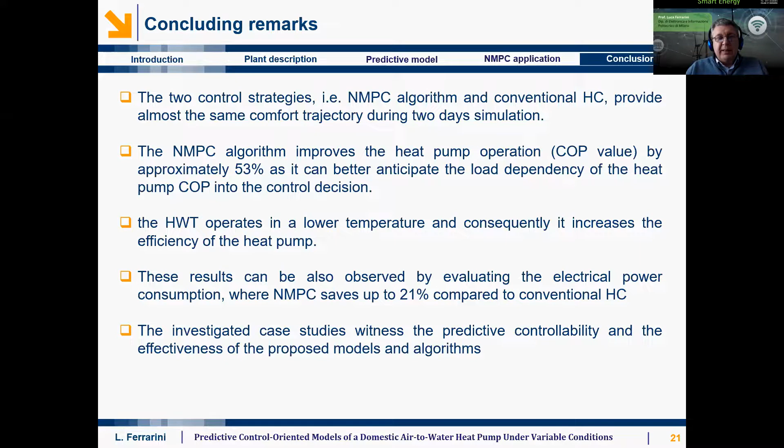And in the end, we are able to save a significant amount of electrical energy with respect to more traditional controllers. We were encouraged by the results, so we tried to move from residential to the tertiary field. In this case, we took a building of Politecnico, which has 4 stories, 18 spaces, 14 classrooms inside.

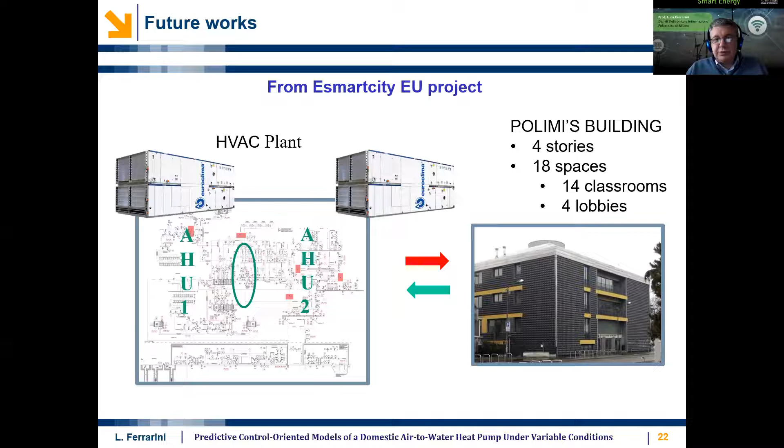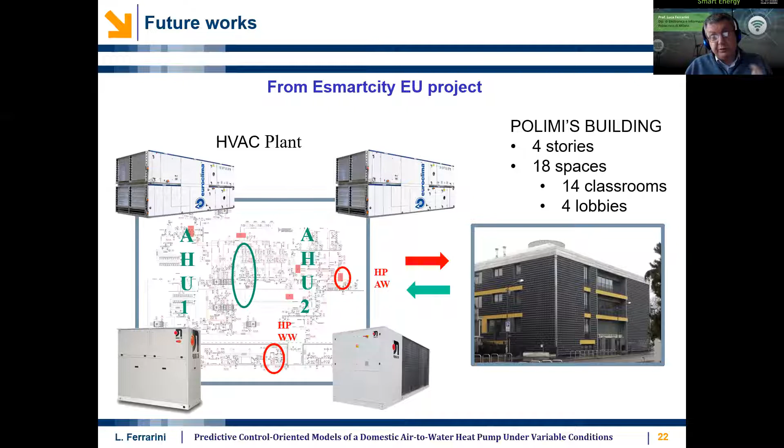And the HVAC is a classic industrial one. So you have air handling units, two of them serving 2 floors each. We have 2 heat pumps, one air to water and one water to water. There is a well in the garden to do so. And then there is a complicated system of distribution of the water through radiators and fan coils. The air handling unit also contains some temperature control for the water.

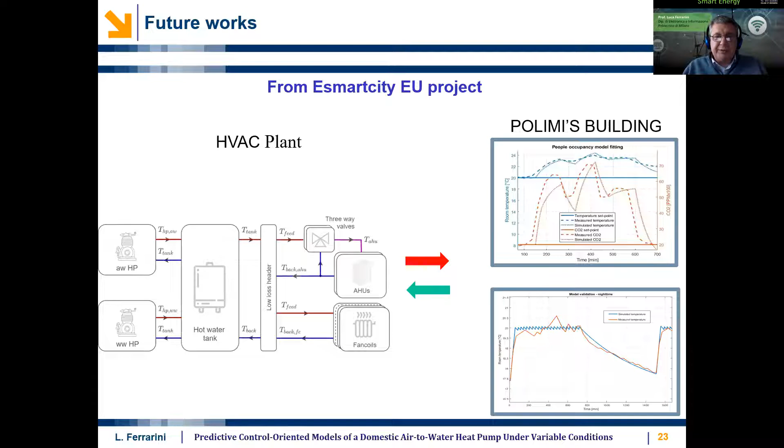So basically what we did is simplify the model. As usual, we simplify the model to the most essential parts for the thermo-hydraulic system. For the building, we try to identify the main responses through the classic gray box model, so the heat transfer coefficients were assumed to be unknown and identified from the data. We put a lot of sensors inside the Esmartcity project that Athanasios mentioned before, and so we were able to capture the main dynamics of the room temperature and the wall temperatures.

In the end, we are setting up a nonlinear MPC, so the only difference is mainly the scale. Now the scale is much, much bigger than what we have seen before, and there are a little bit more devices and more industrial ones—air handling units, different COP, and so on.

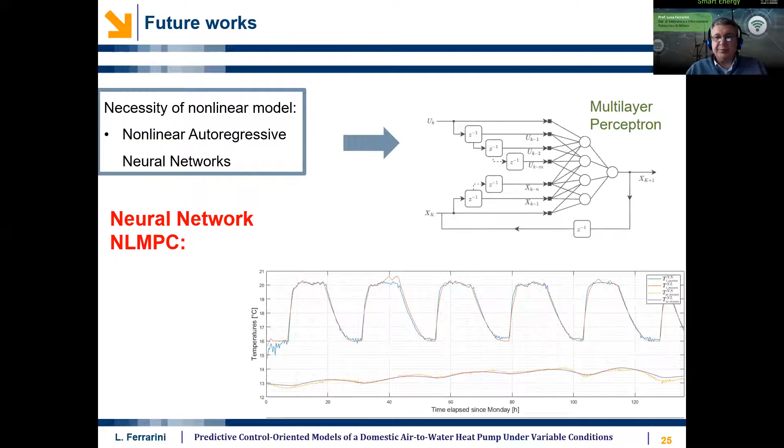We are also trying to use neural networks, not only differential equations, to model our system, and we are getting some good results. I think they are less good results because the quality of the tracking is a little bit worse, but the advantage is that you just take the data and magically you are able to set up a controller. So we use the neural network, train it based on the data, and then we transform the neural network model into a nonlinear model that we use in the nonlinear MPC. This is a quite innovative way to deal with this—a combination of a neural network and the MPC approach.

We are going to deal in the future with a more reinforcement learning, machine learning approach, even if personally I'm not so positive towards this approach, because we just took some bites of this problem, but we immediately understood that it's less easy. For sure, it's less easy. For example, the training of control agents is more complicated—you need a huge amount of data.

Even in the first talk, Athanasios mentioned this: 1 year of data is not enough. Usually for a heat pump, you need maybe a few minutes of data, and for a room, maybe a few days of data. But machine learning needs a huge amount, months of data, and this is exactly what we are experiencing even in simulation. And if you happen not to use sufficiently rich data, you have an unstable behavior.

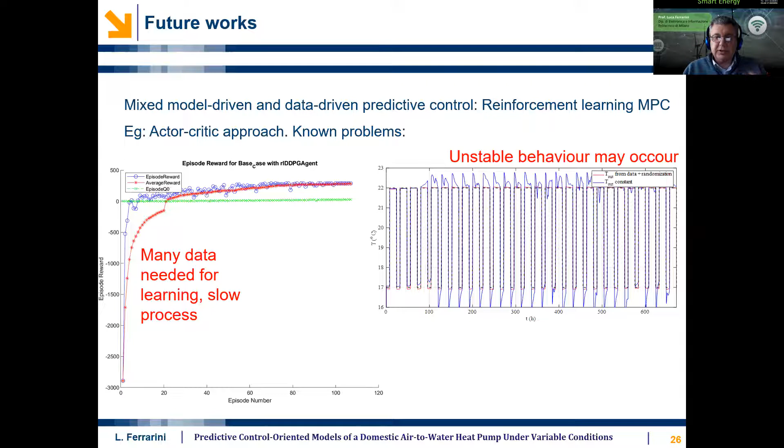Another point that is, again, disappointing to me: if you zoom in when you think the system is working correctly, you see that you are not even able to track very well the temperature. Nothing important, let's say we're talking about 0.1, 0.2 degrees, but if you zoom in on a PID control performance, you see the temperature perfectly tracked. So it means we are going to study this further.

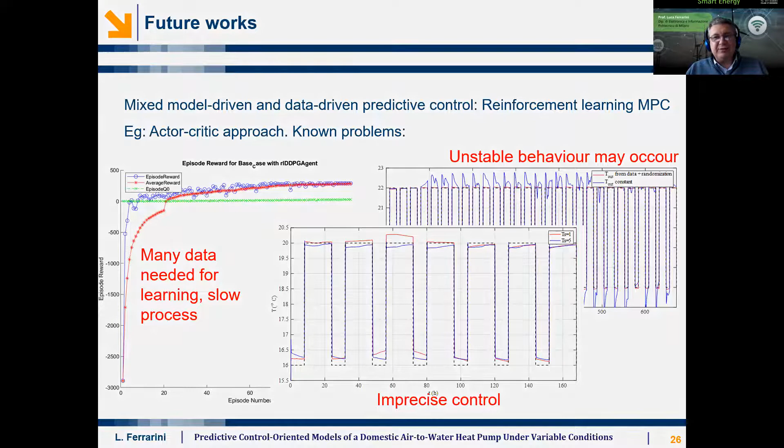My expectations are not so high, but maybe a combination of model-driven, meaning equation-based, controller with more data-driven approaches, which basically means you try to fill your ignorance on the model thanks to lots of data, may have a better performance in some cases. We are looking for these positive cases. At the moment, we are still working on that. Okay, that's all from my side.

Thank you, Luca. It's very, very interesting, especially that you also have some mechanical engineering people, people that are more familiar with the thermodynamics of the system and the control, your colleagues.

I see some questions on the chat. So there is one on air-water heat pumps.

Yes, for sure they have some limits. The ones that were told to us by the manufacturer, we implemented them. And for the Denmark case, there is also an additional device heating the external part of the system to inhibit the formation of icing on the external fans. We didn't model it explicitly because for us this is basically an additional electrical consumption which is able to protect the heat pump.